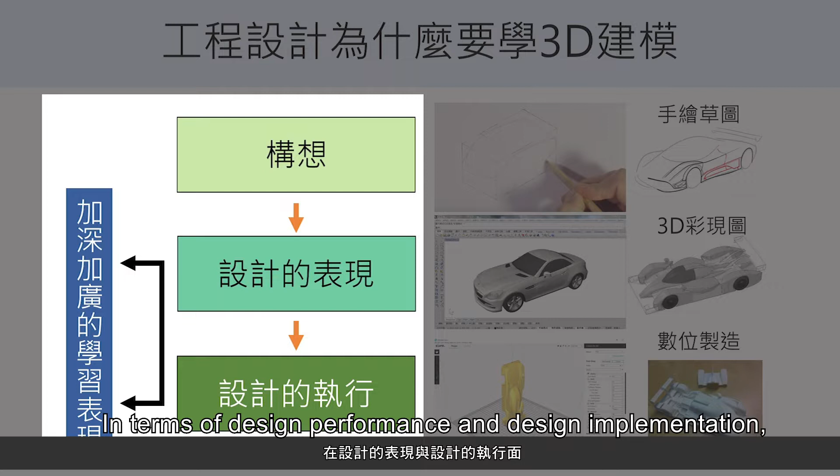In terms of design performance and design implementation, we hope students can make good use of digital design tools to deepen and broaden their extended studies, such as the design sketch completed by students regarding its design modification, detailed structures, spatial organization. If digital tools can be used, whether for photorealistic rendering of 3D models or modification of structural details, it will be more convenient than hand-drawn sketching.

At the same time, if 3D drawing tools are used for design modeling, it can also serve as objective data analysis for engineering design. Predictive analysis is an important learning ability in our in-depth learning, which will further serve as a problem-solving and design thinking method.

Also, for design implementation, especially regarding prototype manufacturing, modern 3D tools combined with digital output equipment such as laser cutting machines, 3D printers, and CNC engraving machines can make students' ideas come true more quickly, while also improving the quality of design and manufacturing.

Therefore, for the design implementation part in the in-depth learning course, students should use digital output equipment as much as possible so that through the process of concept development, 3D modeling, and predictive analysis, the model can be further outputted and go into testing assessment after engineering design prototype manufacturing, so as to make the test and evaluation more objectively accurate. This is also an important reason for learning how to make good use of digital tools and output equipment.

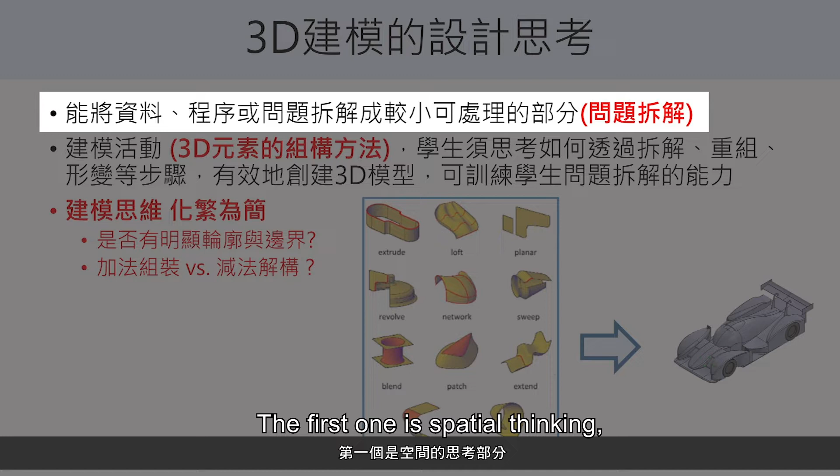The first one is spatial thinking. You need to learn to dissect the problem and disassemble the overall shape or structure into smaller parts that can be handled. For example, this Le Mans racing car at the lower right corner, we can disassemble its tires, wheel hubs, cockpit, rear wheel arch, spoiler, and chassis part by part, and then combine them together to complete this Le Mans racing car.

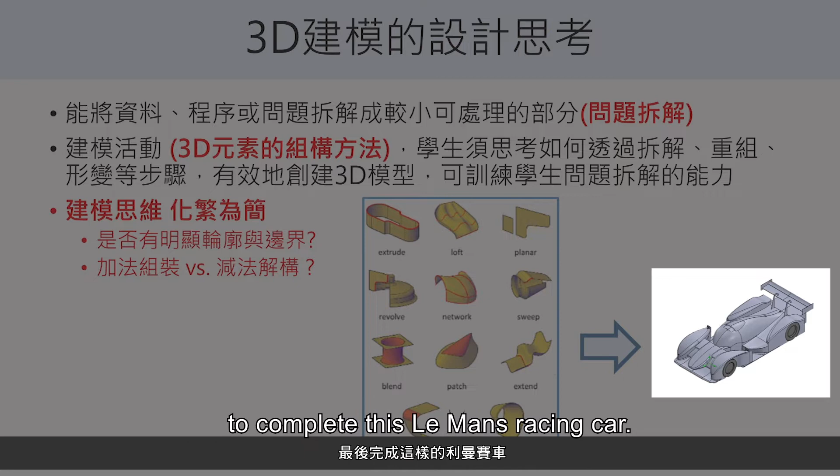The second tip for learning 3D modeling is to familiarize yourself with the commands through modeling exercises. These commands are all assembling methods for 3D elements. Through this practice of disassembling, assembling, and shaping, students can effectively create the 3D models needed. Therefore, familiarizing with the commands is also an important learning process for learning 3D modeling.

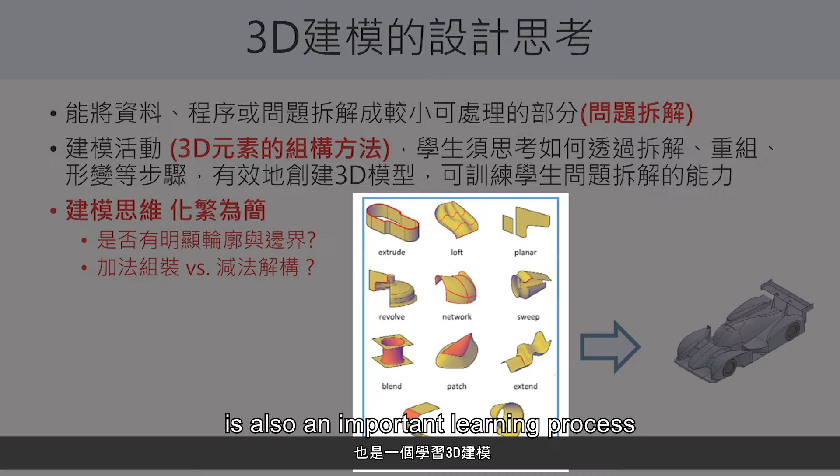The next step is comprehensive modeling thinking, which is mainly to simplify what is complex. You can first observe whether there is a clear contour or boundary in your design model.

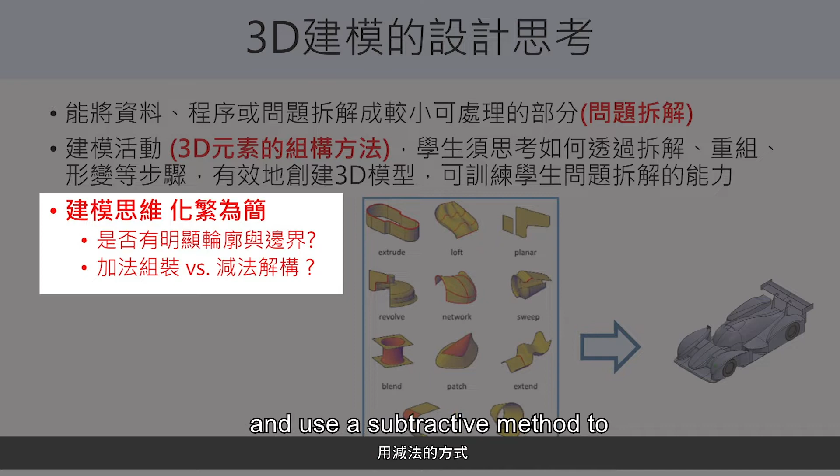For certain modeling, we use additive construction. For some others, we do the opposite and use a subtractive method to complete the final shape we want. These are modeling design thinking, flexibly applied onto 3D modeling tips.

Therefore, mastering the modeling rules is helpful for learning 3D modeling, especially for later on when students want to create their own 3D models. Mastering these rules is very important for future design modeling.

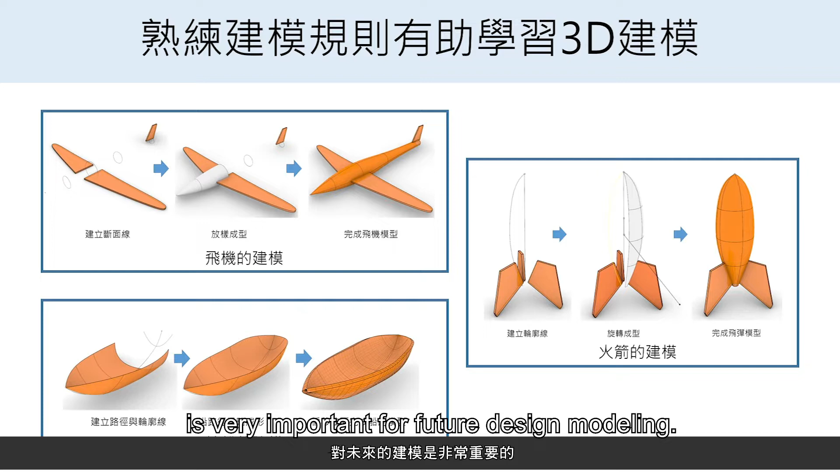Here we will briefly introduce some commonly used 3D modeling commands. The first command introduced is extrude. For extrude, we create a contour line, such as a square, and we turn it 3-dimensional. This 3-dimensional process of extruding the square into a cube is called extrusion molding.

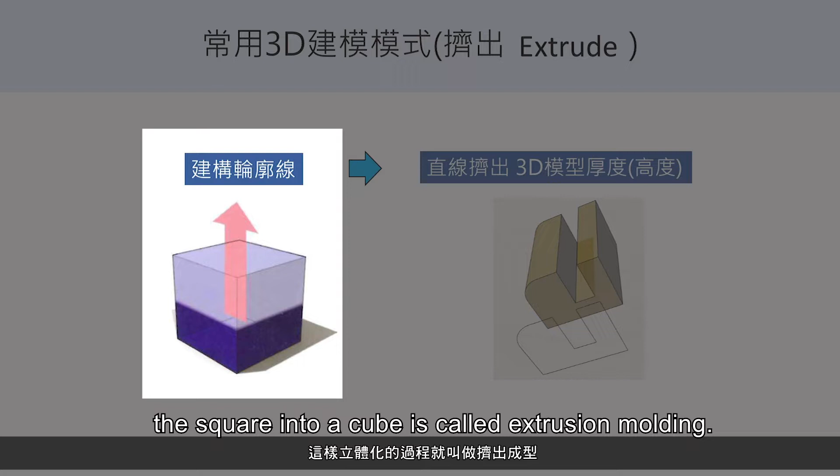As seen at the right, there is a concave-shaped contour. We extrude it to make a 3-dimensional concave-shaped square, which is also a modeling concept for extrusion molding.

The second commonly used 3D modeling command introduced is revolve. For revolve, we create a contour line from its side, such as an arc with a waistline, and after rotating it around the central axis, it will become like a vase with a waistline. This concept is called rotation molding.

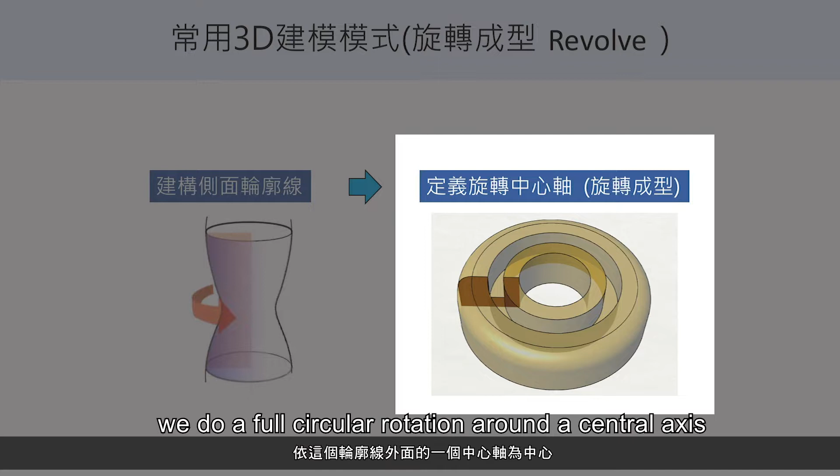On the right, we also use a concave contour line. We do a full circular rotation around the central axis outside this contour line, and we get a hollow 3-dimensional shape similar to a tire structure, which is also an application for rotation molding.

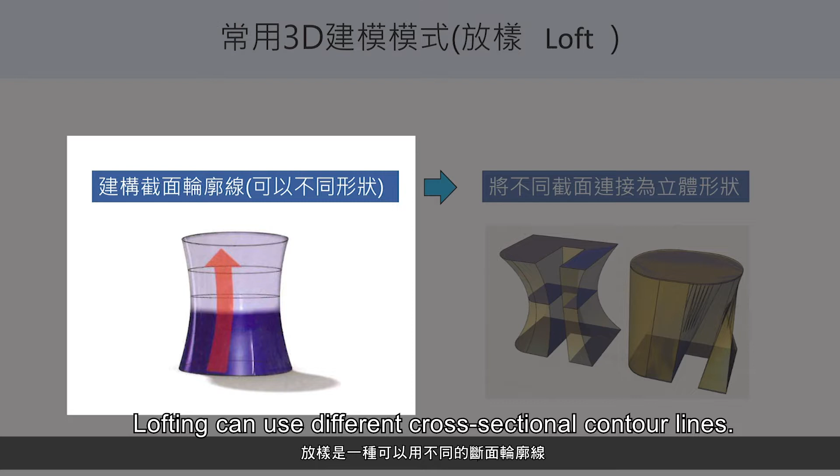The third commonly used 3D modeling command introduced is loft. Lofting can use different cross-sectional contour lines. For example, we use a large-sized ring and a medium-sized ring followed by another large-sized ring. Each ring is a bit like the concept of making a lantern. We use cloth to stretch it up and wrap it around 3 or 4 different rings. The shape formed in this way is called lofting.

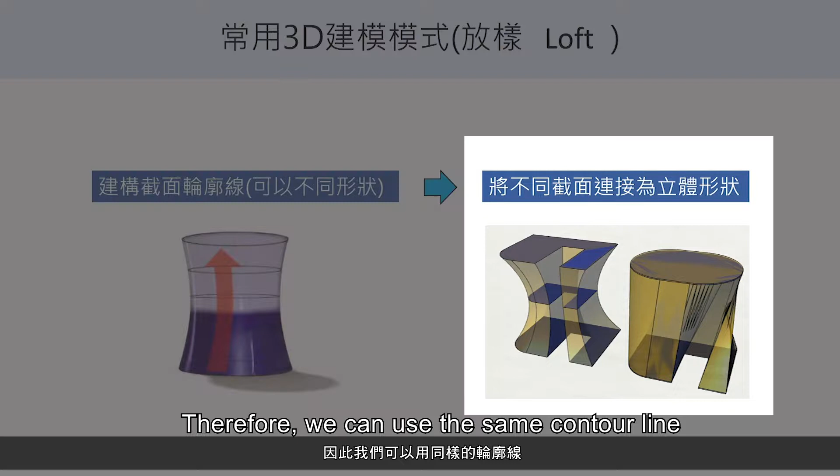We can use the same contour line or completely different contour lines, as long as it is either a closed loop contour line matching another closed loop contour line, or an open loop contour line matching another open loop contour line, to be used in the loft command for shape forming.

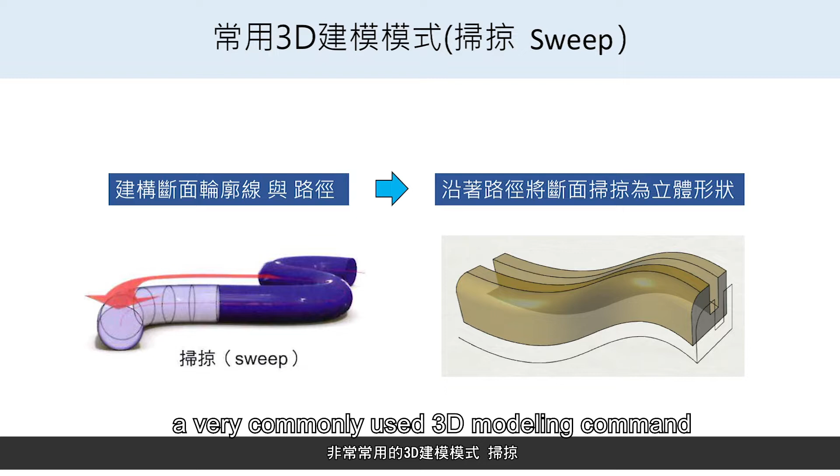Finally, we will introduce a very commonly used 3D modeling command: sweep. For sweep, after a contour line is created, we set out a path. On screen, we use a circular cross-section as the contour line and an S-shaped wavy line as the path. After sweeping, it becomes a curved shape, similar to a water pipe.

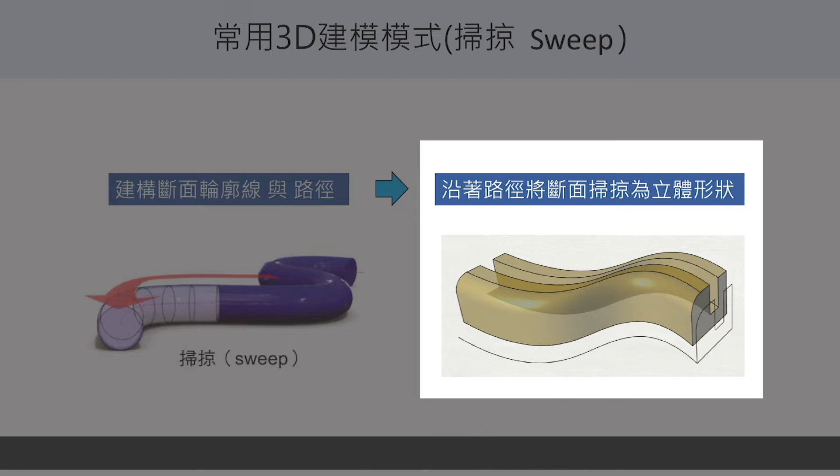On the right, a concave outline is also used, with a wavy path. With this cross-sectional outline following the path, the shape we get is a curved 3-dimensional shape, as you can see here.

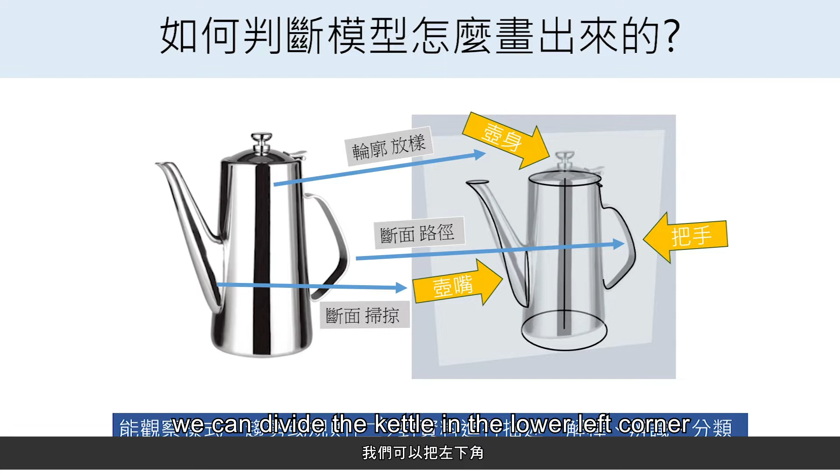From the 3D modeling commands introduced earlier, let's think about how this water canteen is drawn. From the disassembly of the space problem, we can divide the kettle in the lower left corner into 3 parts: the spout, the body, and the handle. On the right is a breakdown explanation of these 3 parts.

For the canteen's spout, we completed a small oval cross-section and a large oval cross-section, swept along this path to make the shape of the spout.

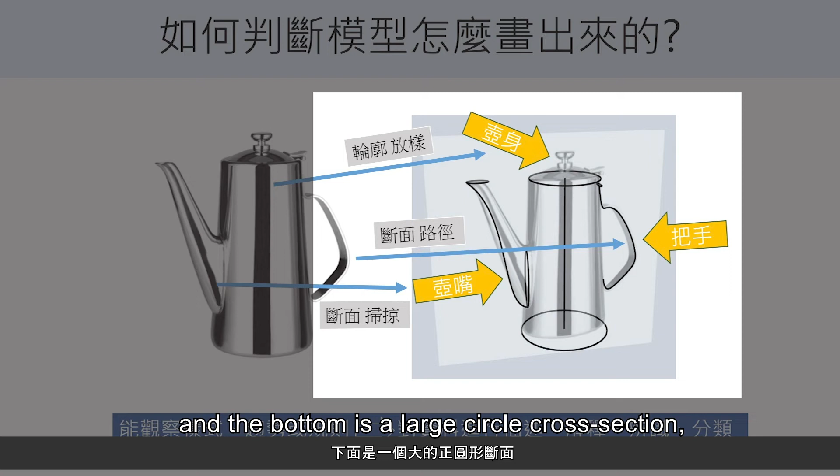For the canteen's body, the top is a small circle and the bottom is a large circle cross-section. We make the shape of the body through lofting.

For the canteen's handle, we draw an oblate circle, swept along the hook-shaped contour line to complete the handle. Therefore, this canteen can be completed using these 3 3D modeling commands.

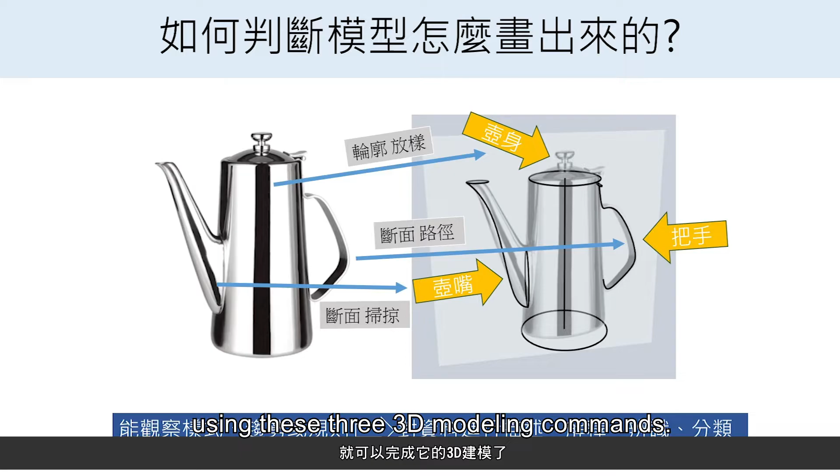We have introduced some basic concepts of 3D modeling and some tips for modeling. Next, we will go through actual operation of 3D modeling.

The software used for demonstration is Rhino, which means rhinoceros in Chinese. This 3D modeling software is used in engineering and is generally used in industrial product design. Generally speaking, it has the following 5 main features, which is why we choose to use it.

First, it can create a variety of 3D shapes free of any constraints. Second, it is a software that is easy to learn, and users can concentrate on the design of the concept idea without spending too much time learning the commands and parameter settings.

Third, its precision. It is accurate enough to meet the needs of the various stages of design, digital manufacturing, and engineering analysis. Fourth, its software compatibility is very good. It can combine with other design, drawing, digital manufacturing, and engineering analysis software, which can all be used together.

Fifth, its hardware requirements are very low. It can perform very well on ordinary laptops.

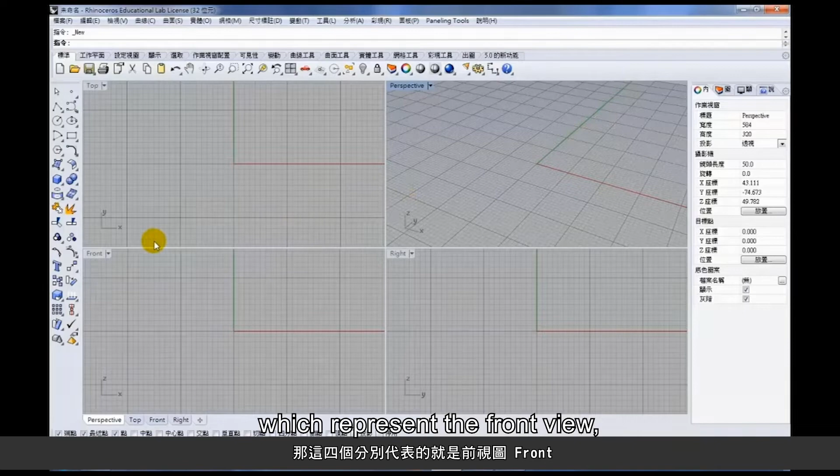After opening the Rhino template, we will see that there are 4 panels on the screen, which represent the front view, top view, right view, and perspective view.

I will draw a cube to explain what each of these views represent. There is a cube command here in Rhino. You can left-click your mouse to select this command. I will draw a long rectangle at the top view, while at the front view, I will drag it to a certain height. And you can see this model in the perspective view.

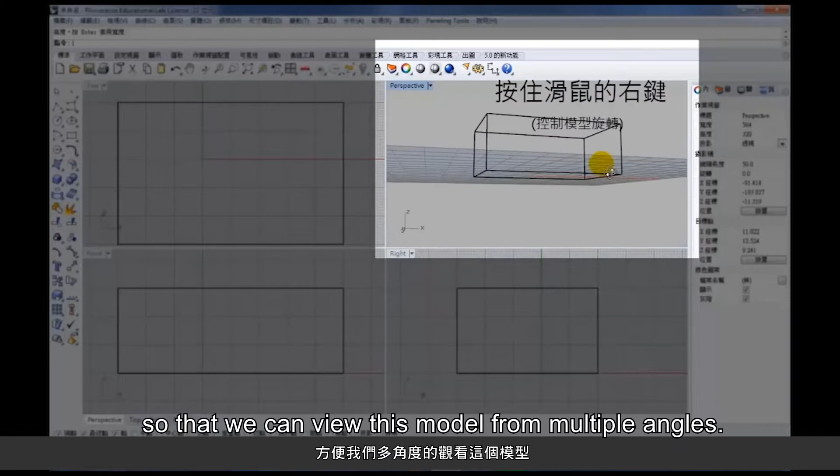Here I right-click and hold the mouse to rotate the model so that we can view this model from multiple angles. The current model only shows the frame lines, so this is called the wireframe display.

If you want to see more clearly, you can right-click your mouse in the perspective view and select the shaded display. Likewise, in the front view, we can also right-click to change to shaded display. The top view can also be changed to shaded display, and the right view can also be changed to shaded display.

Here I will explain the angles of the front view, the top view, and the right view and their relationship. In terms of this 3-dimensional square, if we turn in this direction, it represents the shape of the front view. So you can see these 2 shapes are the same.

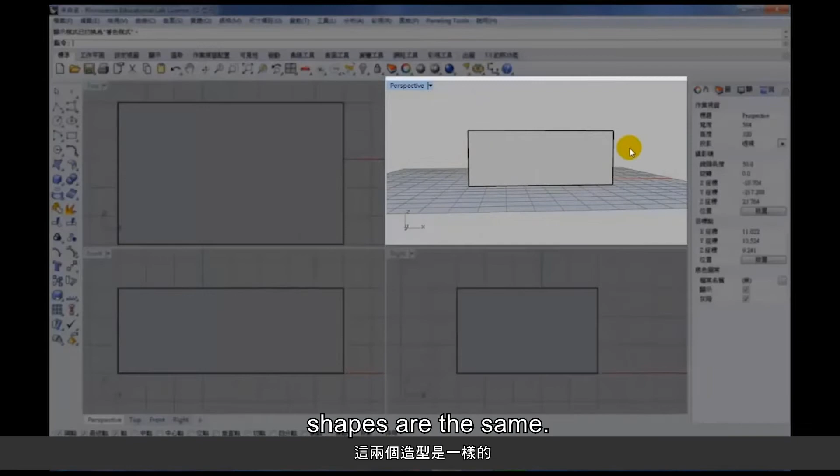The top view is to look at this model from above. I will rotate to an angle from top to bottom. And you can see that this shape is the same as the top view.

So in the same way, let me go back to the front. When we see this model from the right side, it represents the right view. So this is consistent with the concept learned in graphics.

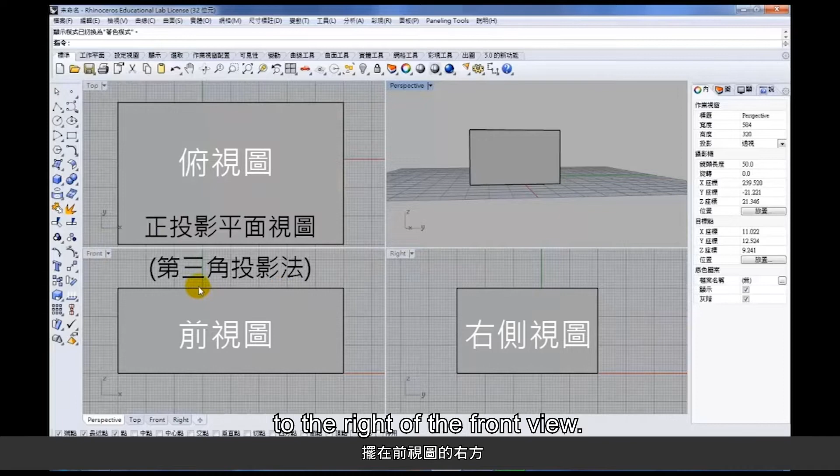Front view, top view, right view. This is the 3rd angle projection method, which is what we call the orthographic projection planar drawing method. Its relative position is that the top view must be above the front view, and the right view has to be placed to the right of the front view. So this is the basic concept of graphics. The upper right corner shows the 3-dimensional shape, which helps users view its 3-dimensional relationship at all times.

Next, we will demonstrate how to switch between panels in Rhino and control the model. In the Rhino environment, we click on each panel, and it will automatically switch to the operation of that panel. For example, I click on the front view panel, it will switch to the operation of the front view. I go back to the right view and click it, and it will automatically switch back to the right view.

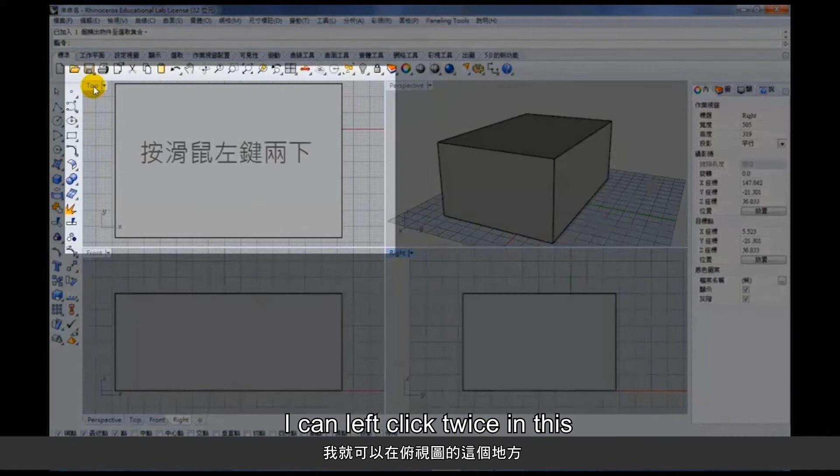In the top view, let's say I feel like I need to enlarge it to work on it. I can left-click twice in this place on the top view and enlarge it to a full screen size so as to facilitate my drawing. In the same case, I left-click twice here on the top view and it will switch back to the original 4 panels. This is the way of switching panels in Rhino.

I will repeat it again. For example, if you click twice on the front view, it will be maximized. Click twice again, and it will switch back. Left-click twice on the right view, and it will be maximized. And left-click twice again to switch back.

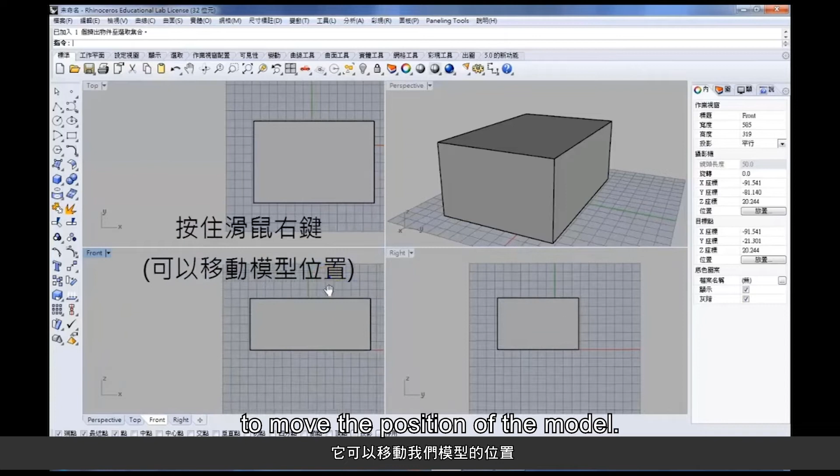This is for switching between panels. Regarding the control of the model, we can change the size of the model by turning the wheel in the planar view. Right-click and hold to move the position of the model. This is the way to control the model in Rhino.

For example, I click twice on the top view to maximize it, and if I want to enlarge the size even more, I turn the wheel to zoom in to do the control needed for our drawing. This is the way of adjusting the model that we often use in Rhino.

Right-click and hold in the perspective view to rotate the model. Since it is not possible to rotate the viewing angle in any planar view, right-clicking is defined to move the model instead.

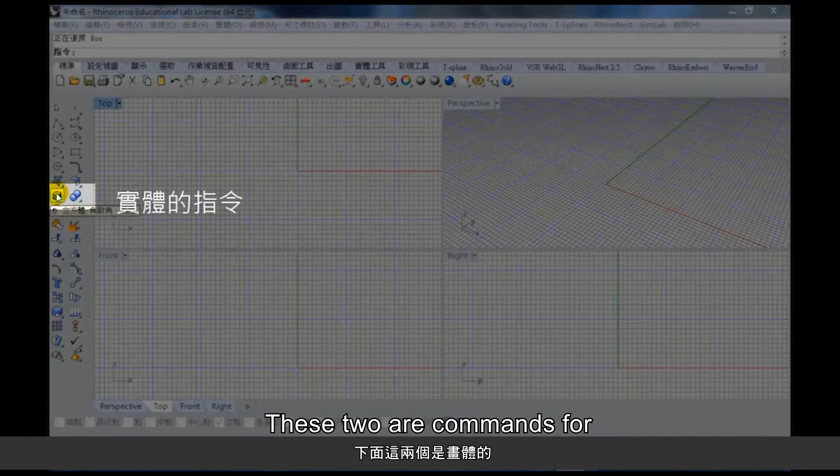Rhino's command interface can be divided into graphic type commands on the left side. At the top of the graphics commands, here is the selection tool and the point tool. These 8 icons are all styling commands for drawing lines. These 2 are commands for drawing or editing of surfaces. These 2 are commands for drawing and editing of solids.

These last few ones, some of them are for grouping, exploding, copying, and trimming, and these are other application commands related to the operation of 3D models.

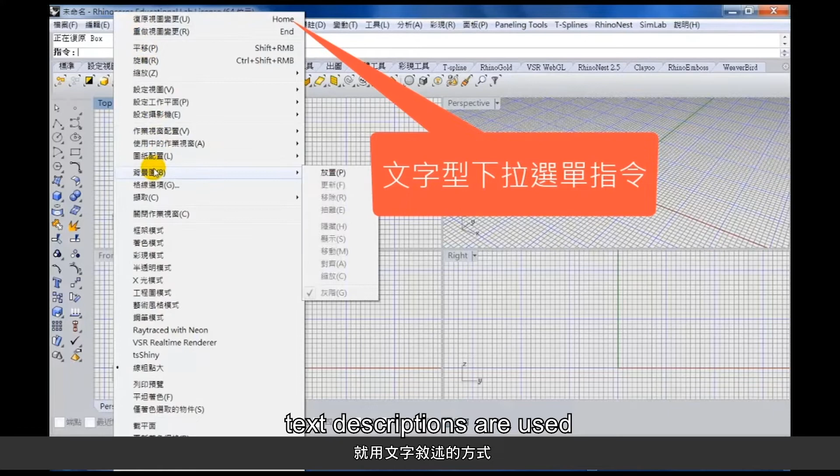The upper part can be divided into 2 parts. This part is a menu type command. When you select the menu, the relevant commands will be listed for you to use. The same goes for the display and select menus. These at the top are text type drop-down menus. In our menus, text descriptions are used to explain the operation commands. This is the way commands are arranged in Rhino.

Here, we will use a solid command to explain model control in Rhino. If we click our solid tools icon for a bit longer, we can change the shape command. There is cube, sphere, ovoid, parabola, cone, truncated cone, and pyramid.

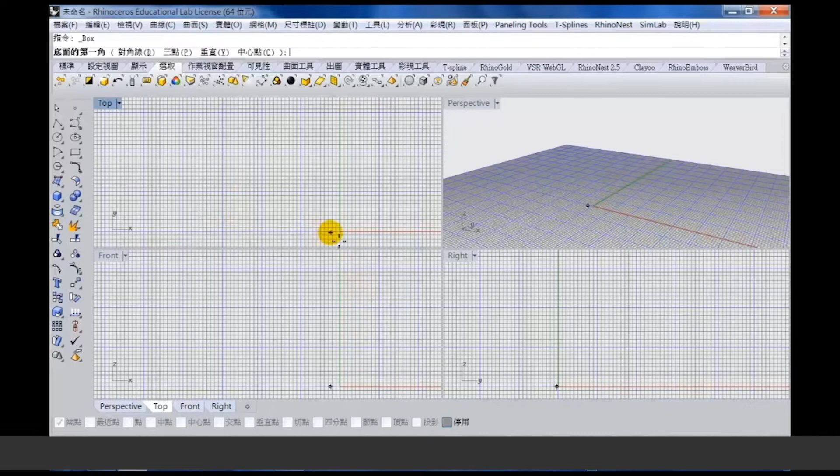These shapes can be directly drawn as a 3-dimensional shape. For example, I draw a square on the top view panel from the coordinates origin to a distance diagonally of 3 times 3 large grid segments, and then a height of also 3 segments.

This kind of drawing, we may think that the size is 3 times 3 times 3, but when we enlarge the model to a certain extent, we realize that we did not actually align it to the position that we wanted. So it's not very accurate for us to draw a model by visual observation.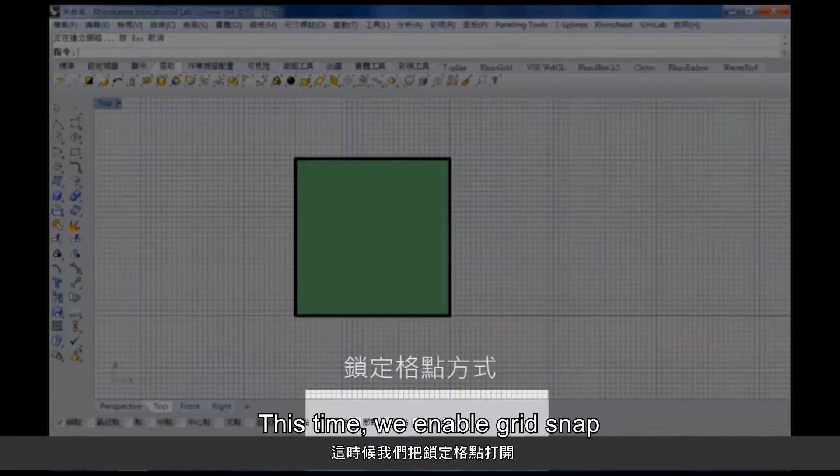Here I draw another 3 times 3 centimeter square through object snapping for you to see. This time, we enable grid snap and object snap. We again use the cube command. You can see that now the cursor is like a magnet and will attach to these points.

Again, I will draw up to 3 grid segments diagonally, and then in the front view, I will drag its height up to 3 segments. At first glance, the 2 models look the same size, but we have just proved that at this point, it is not precisely at 3 centimeters.

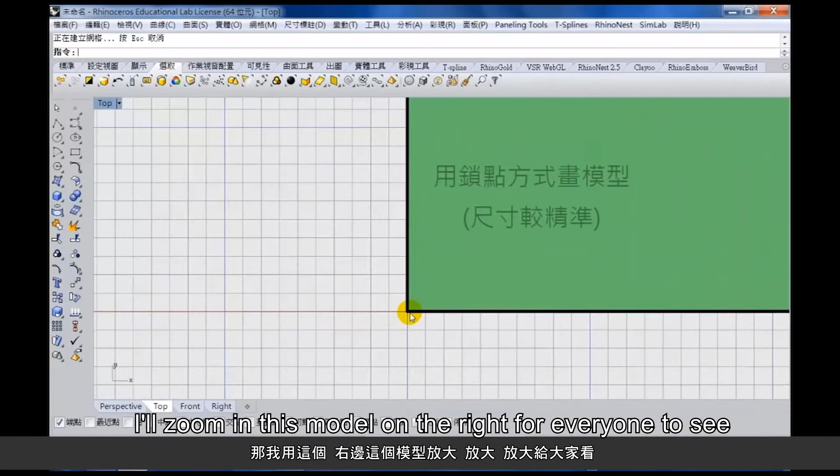I'll zoom in this model on the right for everyone to see. It is, in fact, precisely locked into the position we want. It is so for its left side and also for its right side.

Therefore, when modeling in Rhino, we often need to enable the grid snap and the object snap modes in order to draw our models more accurately. For the following procedures, I will demonstrate using similar methods.

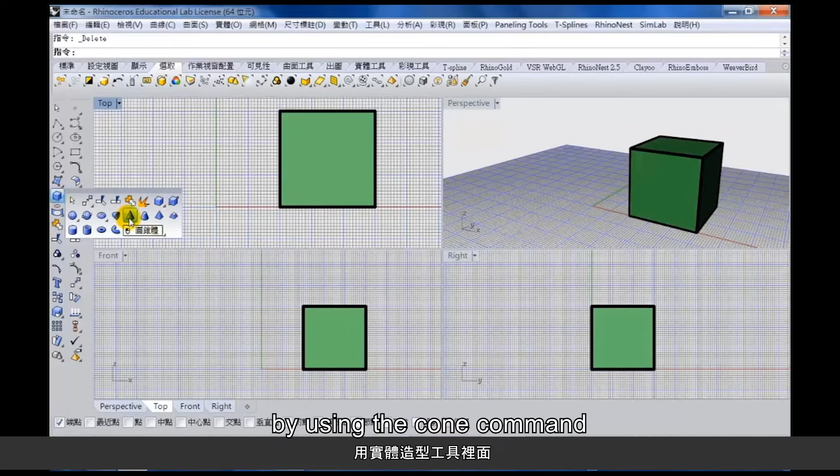We don't want this model on the left anymore. Next, I'm going to draw a cone next to the cube in the same way, using the cone command inside the solids tool. For this cone, I would like its base area to be 4 centimeters diameter, so I'll look for 2 large segments. Then it can be pointed upwards or downwards. You can also draw up to 3 centimeters in the front view panel. This is the cone that I drew.

Next, I will draw a sphere. This sphere command is also found inside the Solids tools. In the same way, I will draw a sphere with a 4 centimeter diameter.

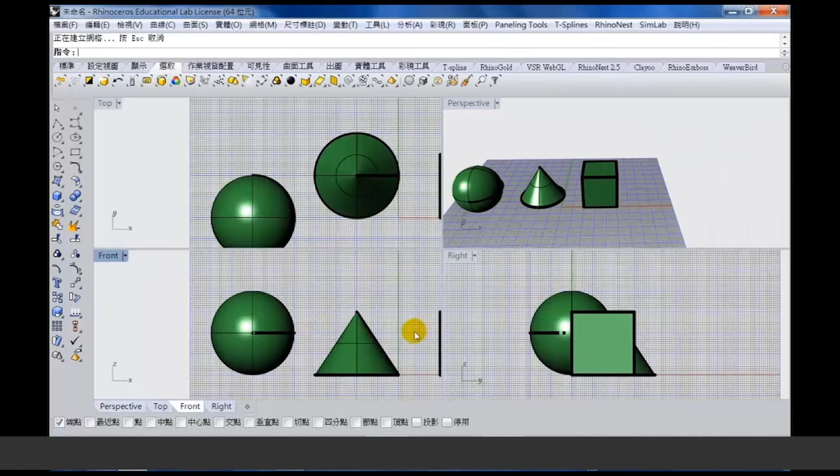Next, I will do some moving, copying, and transformation operations for you all to see. There are many ways to do this part. There is a great tool in Rhino 5.0, called Gumball. For Gumball, we select an object.

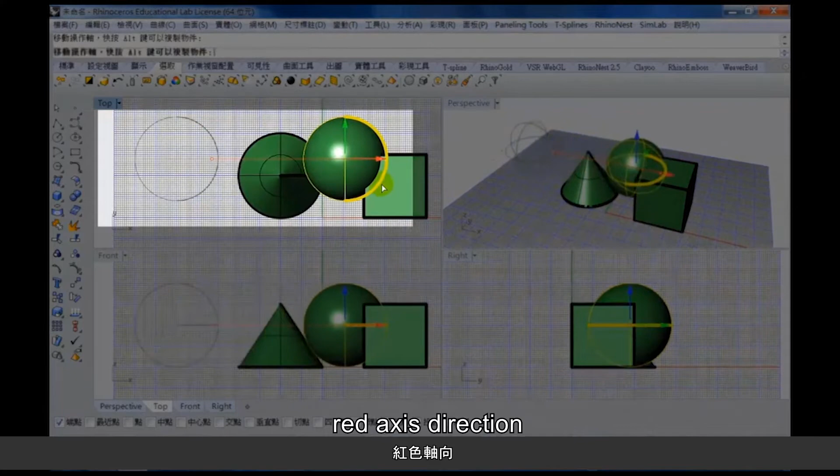A point is defined at its center, and there will be some cursors. We click on the cursors, and in the green axis direction, red axis direction, or blue axis direction for height, we can control it with precision.

This way, we can move the object to the position we want. For example, if I want to make an effect similar to the stacking of building blocks, I will move the sphere on top of the cube. I will align it right in the top view panel, and then in the right view panel, I will adjust the height to the position I want.

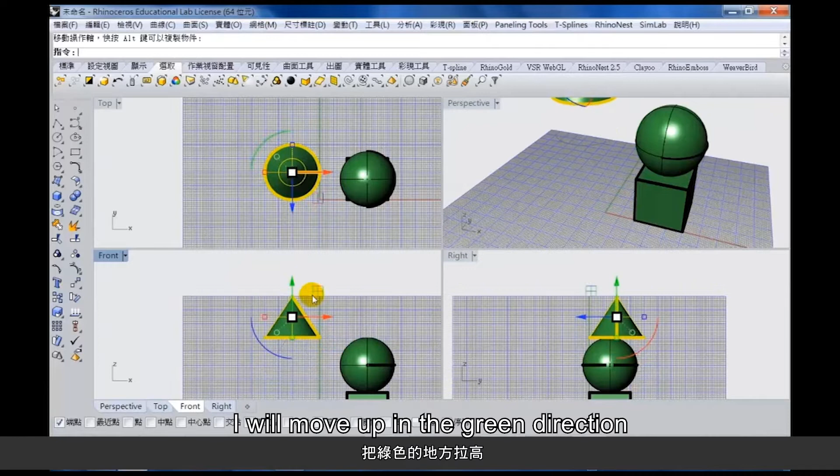Then, I will put the cone on top of the sphere. In the same manner, by controlling the gumball, I will move up in the green direction and adjust accordingly in the red direction. Then in the top view panel, for the front and back depth position, put it in the same position as the sphere.

Then open the perspective view panel, so through the movement of the gumball, we can accurately place each 3D model in the position we want. This is the operation method of the gumball.

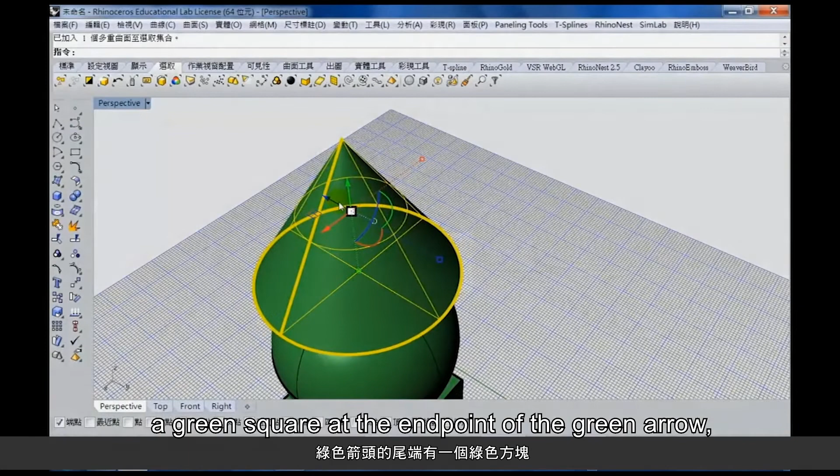You can carefully see that there is a square at the endpoints of each arrow of the gumball. For example, there is a red square at the endpoint of the red arrow, a green square at the endpoint of the green arrow, and a blue square at the endpoint of the blue arrow. This square is for the scaling of the axis. For example, now I'll click on the blue axis square.

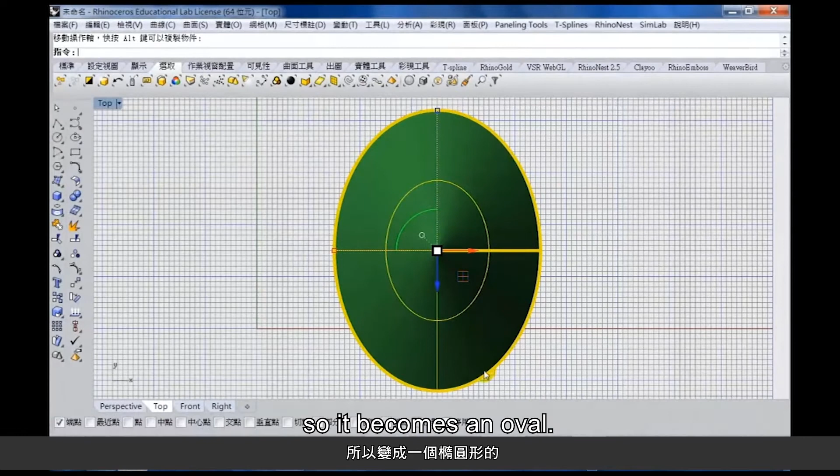Then I can go inwards to turn it into a flattened cone, or go outwards to turn it into a fat cone. The scaling only works in that axis direction—it will only scale in the blue axis direction. The red axis direction will remain 4 centimeters. As you can see from the top view, the red axis is still 4 segments, but the blue axis has been elongated to more than 5 segments, so it becomes an oval. This is Rhino's gumball being able to scale in a single axis.

In the same way, for example, I want this cube to be fatter in the green direction. I will pull the green square and it can elongate. For the sphere, I also want it to be fatter in the red direction, so I click and hold the red square and it gets fatter. So our model turned into this, with its scaling in a single axis.

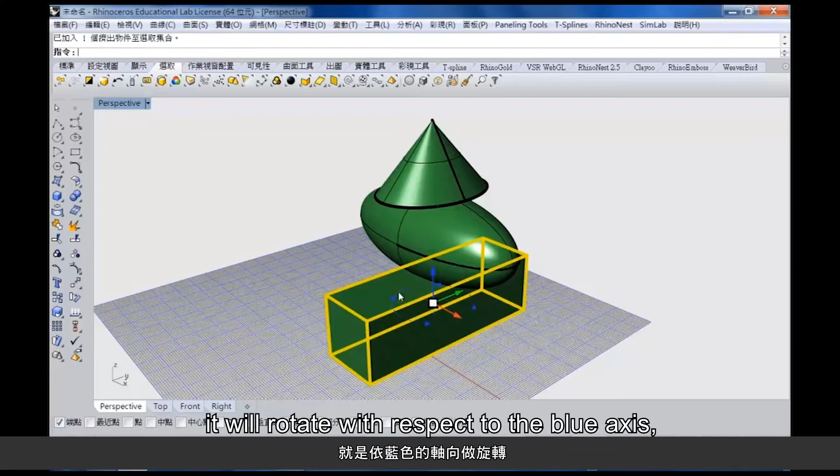In addition to scaling, using the gumball tool, we can also use angular rotation controls. For example, the blue arc, the red arc, the green arc—it will rotate with respect to the blue axis, rotate with respect to the red axis, and rotate with respect to the green axis. For such operation in this 3-dimensional environment, it may be difficult for us to control the rotation according to a specific angle. This situation makes it difficult to control the rotation angle between the models.

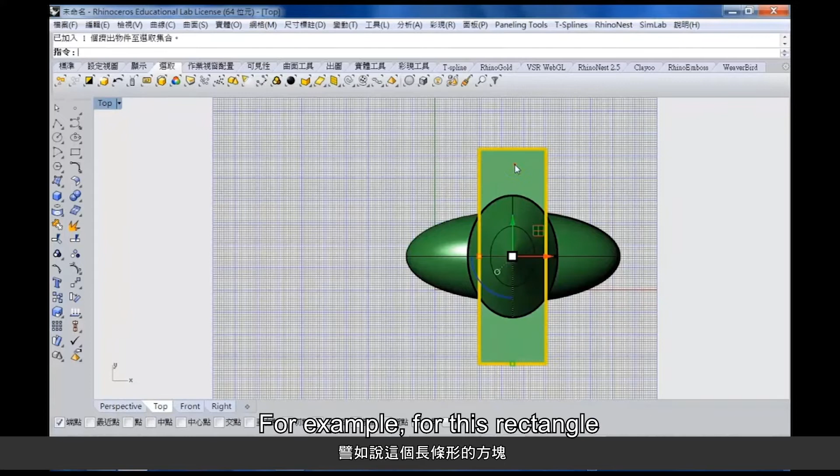Therefore, for the rotation of the gumball, it is generally recommended to operate in a planar view. I will use Ctrl-Z on the keyboard to restore the model to its original angle, and perform the operation in the top view panel. For example, for this rectangle, I will rotate 45 degrees with respect to the blue axis. I click on the blue axis arc and directly input 45 degrees, and then it will rotate 45 degrees. This kind of control is more accurate than dragging.

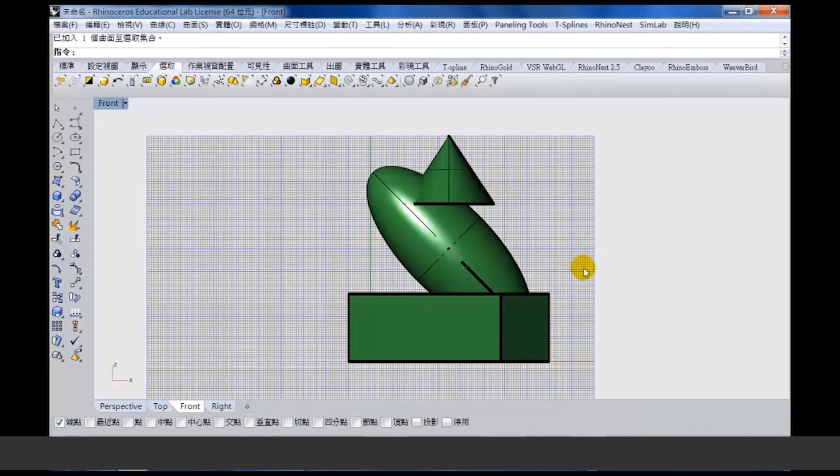This is the use of the gumball. I will repeat the operation again. For example, I select the oval sphere in the front view. I want it to rotate 45 degrees with respect to the green axis. The same way, I input 45 and press enter, and it rotates to that angle. The angle you see with the cursor here is 45 degrees. This is the use of the gumball, which can be controlled through input.

So, I'll demonstrate again. In this right view panel, with respect to the red axis, I input for it to rotate 45 degrees, and it will rotate 45 degrees. The final angle of this model will be like this.

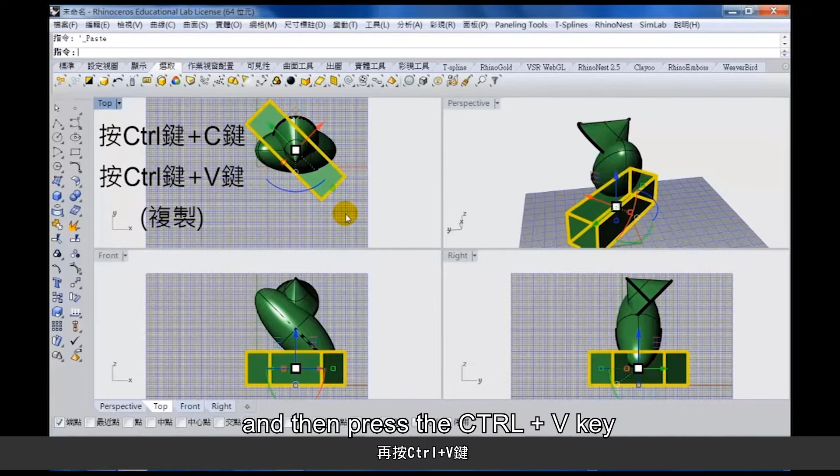We can also use the gumball to perform a copying action. For example, I select this cube. After I select it, I press Ctrl+C and then Ctrl+V to copy an identical model. Then I use the rotation function of the gumball to adjust it to a 90 degree rotation. Now there are two shapes forming a cross.

In the same way, I do the same with the oval sphere. After I select it, I press Ctrl+C, then Ctrl+V, and then with respect to the green axis, I also rotate it 90 degrees. In the same way, it will show a cross with these oval spheres.

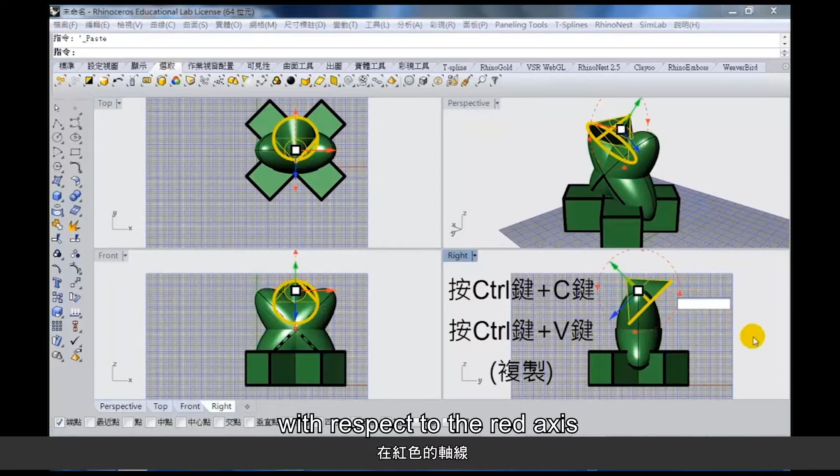Finally, here, after I select it, I press Ctrl+C, then Ctrl+V. With respect to the red axis, I rotate it 90 degrees. This way, we will produce pairs of shapes crossing each other.

So far is the demonstration of how to use the gumball in Rhino 5.0 to control these models, adjust their angles, and copy them. This part's demonstration is now over.

We have learned about the basic operations of the user interface in Rhino. Our next topic will be using commands to perform the first stage of modeling for our compressed air racing car. Here we open the right view panel. Click to enlarge. We will first draw in this panel the tires needed for our compressed air racing car.

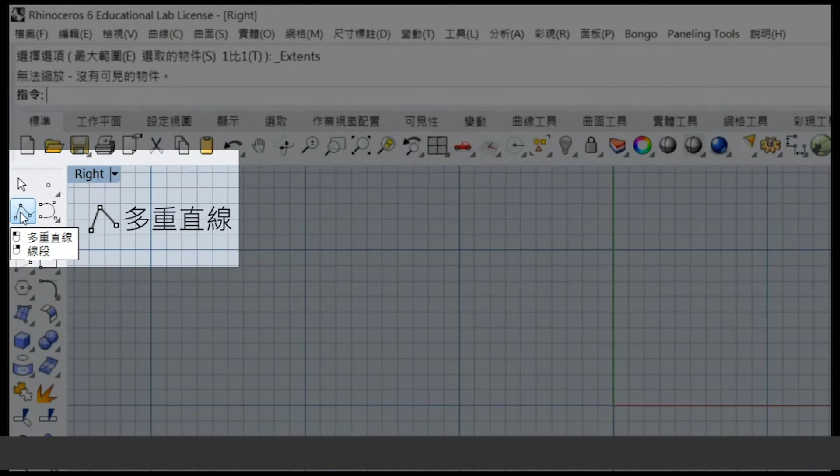First, we select the polyline command. When operating in Rhino, we use the left button of the mouse to select commands, to find the relevant coordinates, or select the relevant objects. This point of origin on the screen is the origin of the global coordinates. At the intersection of the red and green lines, we draw upwards 5 millimeters, then a depth of 1 centimeter, then upwards 1 centimeter, with a total height of 1.5 centimeters. Then go inwards back to our green axis, go up 3 squares, and keep a distance of 3 squares from the lines before it.

Here we have completed the first contour lines that we need. You can see that these are line segments drawn one by one from this polyline. Because we have both grid snapping and object snapping enabled, our position is accurately aligned with the grid points, so what we drew will be of whole number values.

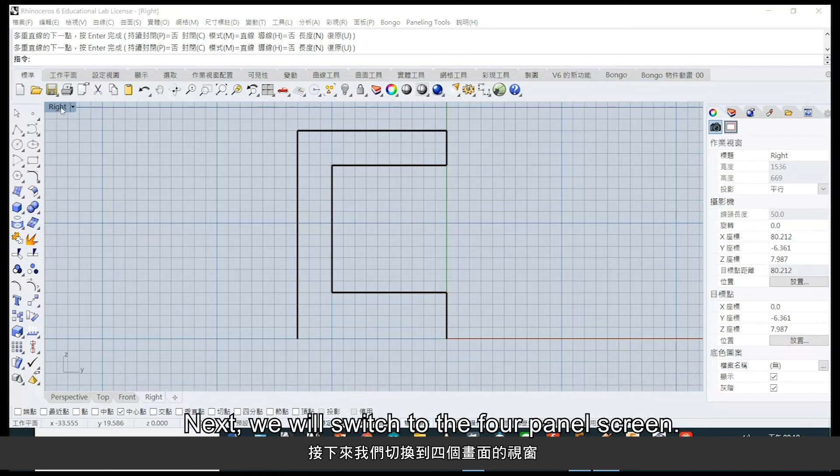Next, we will switch to the 4-panel screen. In the perspective view, we can see that what we just drew was a planar contour line. Here we will rotate this contour line with respect to the green axis, and it will become a 3-dimensional solid model, which is the tire shape we want to get.

Inside the surface modeling tools, with the left button of the mouse, we select the fifth command from the bottom. Select our object. To tell the computer we're done with the selection, we have to press Enter. In here, the right mouse button has the same meaning as the Enter key on the keyboard.

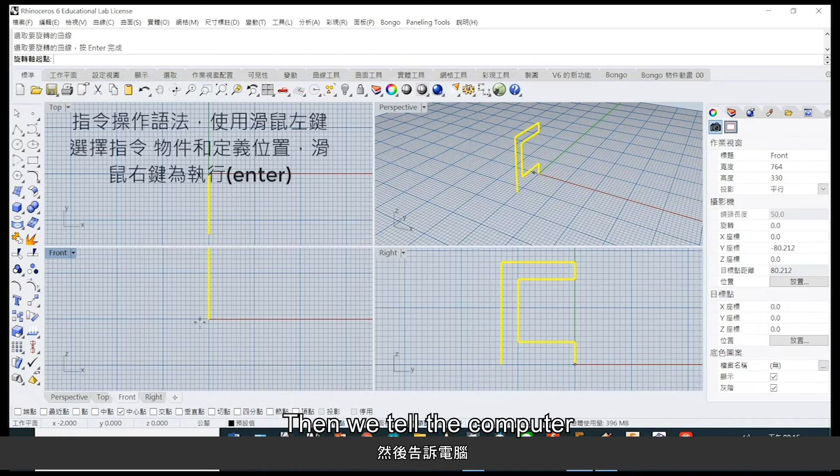So I just press the right mouse button. Then we tell the computer where we define the location point, which is the front view where the cursor is right now. So we find this point at the origin of the coordinates and tell the computer that we are finished defining the point. We press Enter again, or also clicking the right mouse button.

Here, we will see a 360-degree circle and an axis. This is for us to input 360 degrees directly, or, as seen on the screen, we can define the tire to rotate to 270 degrees, which is the meaning of rotational molding. However, our tire basically needs to rotate 360 degrees completely for it to be a complete 3D model.

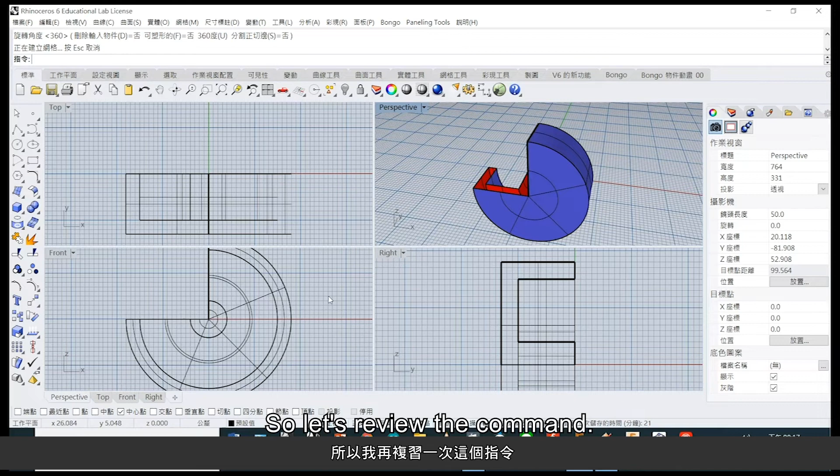So let's review the command. Inside the Surface Modeling Tools, select the Revolve command, fifth from the bottom. Select our object by clicking with the left mouse button. Once selected, we click the right mouse button.

Next, we define the center of rotation, which is the origin of the coordinates, and then press Enter again to tell the computer that we've selected the origin. Then select directly 360 degrees on the command bar, and it will directly complete a 360-degree revolved model.

We can open the perspective view and see that this model is the tire that we want for our compressed air racing car. After these two operations, you will realize that for the commands in Rhino, we use the left mouse button to select the commands or select the defined position. To tell the computer we're done, the step is to press the right mouse button.

Again, let's do another demonstration. We need fillets for this solid, that is, the edges of the tire need a rounded shape. Here we will use the body editing tool. Next to the cube, there is an icon of two spheres stuck together. Press and hold to pop out the window and choose the fillet command.

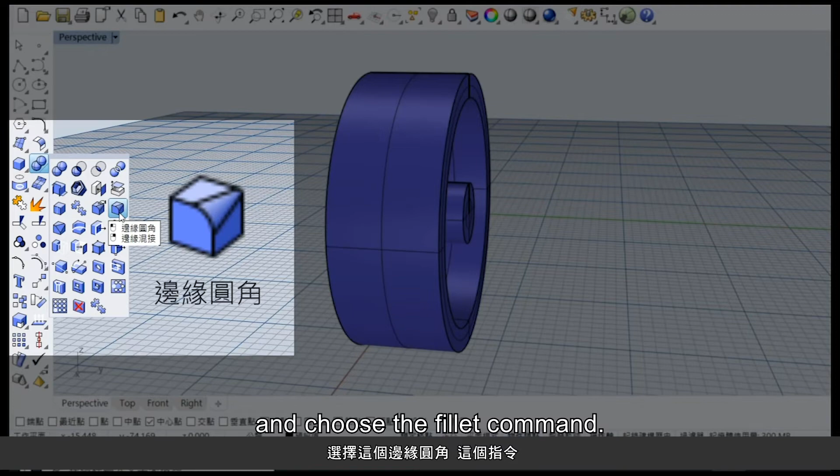After selecting the command, we tell the computer the places processed are these two edges of the tire. Here is to input the fillet radius. Our current default value is 1. Let's see how it looks with value 1. We press Enter directly and see that we turned the originally sharp edges of the tire into an arc shape.

Next, at the corner of the inner side of the tire, we want it to have a larger fillet, to prevent our 3D printed tire from having stress concentration issues at these places where strength is needed, which can cause damage to the tire.

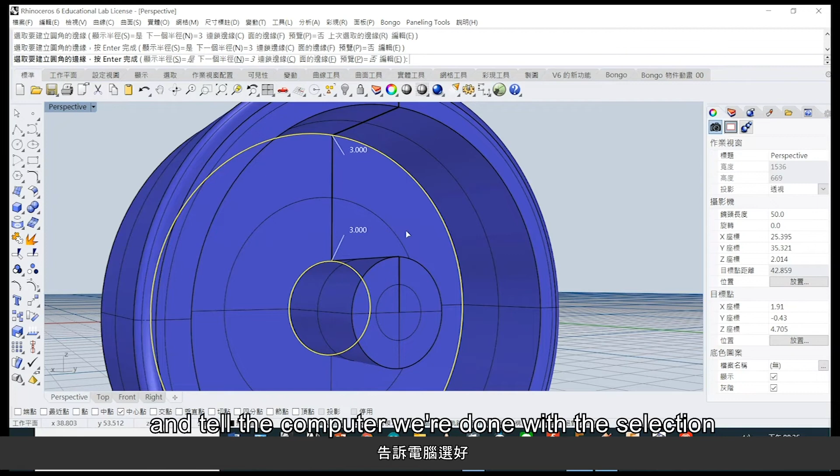So in the same way, we also use the fillet command inside the solid editing tool. Select next radius and input the value 3 so that the fillet can be larger than the previous one. Then select our edges, select these two places, and tell the computer we are done with the selection by clicking the right mouse button. This time, we can get a larger fillet at the corners of the tire and the inner face of the tire.

Now, by drilling an axis hole, we can finish the tire's basic structure. Here, we can directly use the solid modeling tool to create a circular rod by using the cylinder command. In the front view panel, select this point at the origin. We enter a diameter value of 3.5 millimeters, and in the top view panel, we drag a cylinder that is longer than our tire.

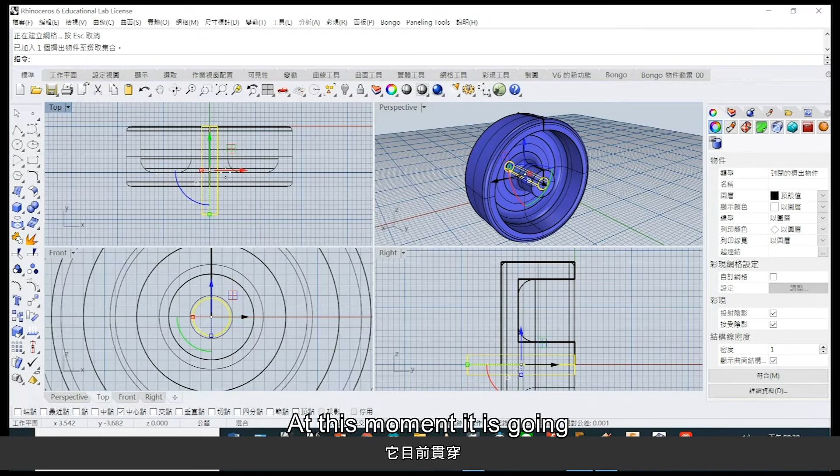I'll select it for you to see. At this moment, it is going through the front and back of our tire. Next, we will use this cylinder to drill out an axle hole shape in our tire that can be used as a 3D printed tire.

What we need to do next is the processing of the model, using the boolean operation inside the Solids tool. There are 4 types of boolean operations: one is union, another is difference, so here we should use boolean difference by doing subtraction.

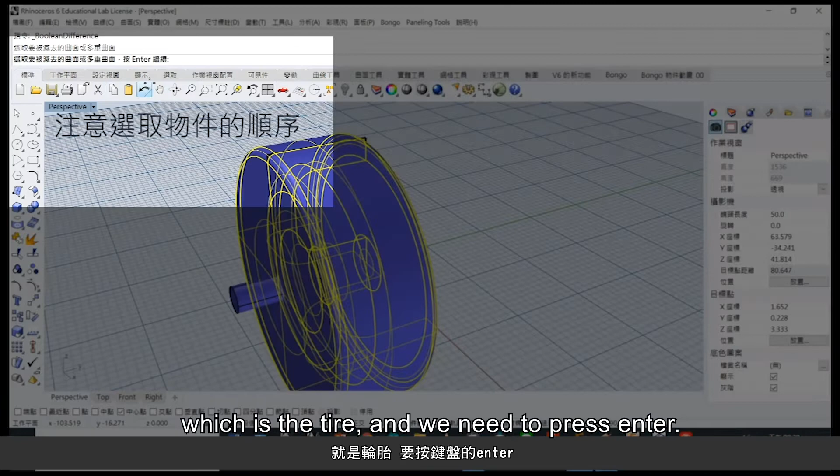The command bar will remind us what to do next. It tells us to select the surface or multiple surfaces to be subtracted, which is the tire, and press enter. Then select the surface used to trim the other object, which is our cylinder. We tell the computer we're done selecting, press enter, and we've completed a tire with an axle hole.

Next, in the front view panel, we use the gumball to copy the tire and move it to the back, and move the original tire forward.

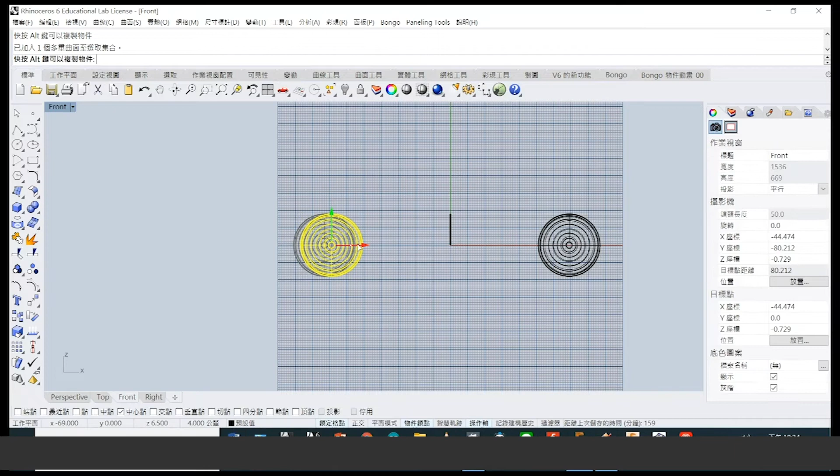Here we need to check our compressed air racing car's side contour line. We make an overall design plan based on the position of the tires. For example, we align the axis of the front wheel to a distance of 3 centimeters from the edge. The rear wheel is also at a distance of 3 centimeters.

Then we draw the side contour of our compressed air racing car. We use the control point curve command to draw the contour line for the side of our compressed air racing car.

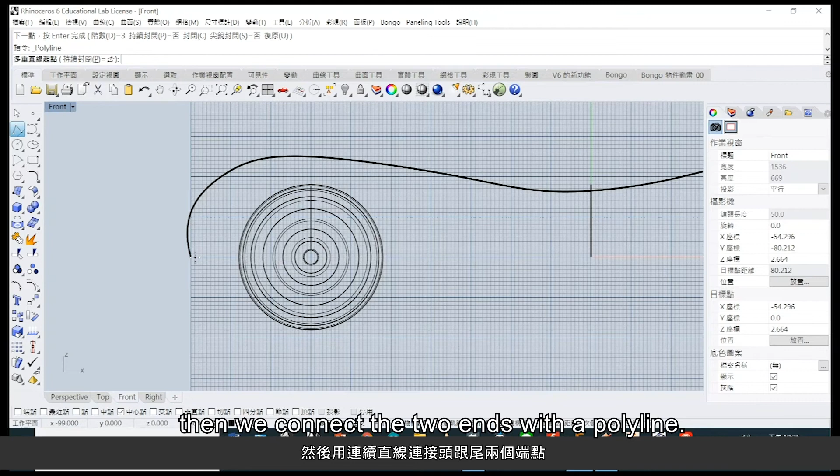And then we connect the two ends with the polyline. This contour line here will be used as the waistline of our car body.

We want the tires to move up a little so it can be hidden under the waistline as the hub of the front wheel. The same goes for the rear wheel, we move it up 5 millimeters, and this will be the hub of the rear wheel.

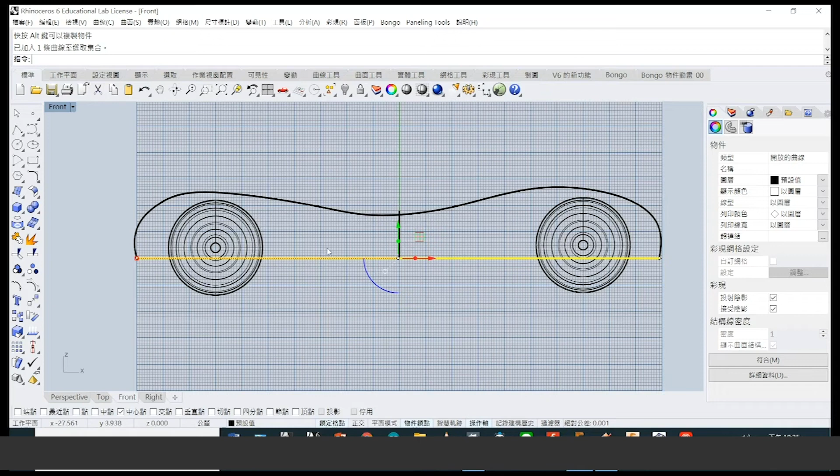Once we've finished the skirt line and the waistline, we combine them together into a closed loop curve. Here, we will do a 3-dimensional extrusion.

The command is inside the Solids tool, the third one from last, Extrude Closed Planar Curve. Select the command, then select the contour line we want to extrude, and press Enter.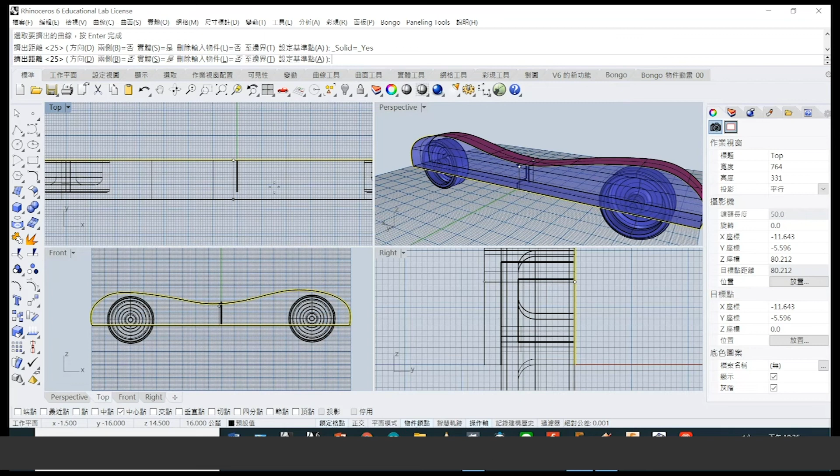Here we can choose both sides or a single side to extrude our contour. We extrude 2 centimeters, then move this extruded solid until it covers the tires.

Next, let's complete the car roof, which is a contour between the shoulder line and the roof. We also use the control point curve command. In the same way, we start from this end point and draw a surface with low inclination as the roof.

We need to go up because the design parameters require 5 centimeters height. From the bottom of the car, we go up 1 centimeter, 2 centimeters, 3 centimeters, 4 centimeters, and 5 centimeters. The car body's highest point should reach up to here.

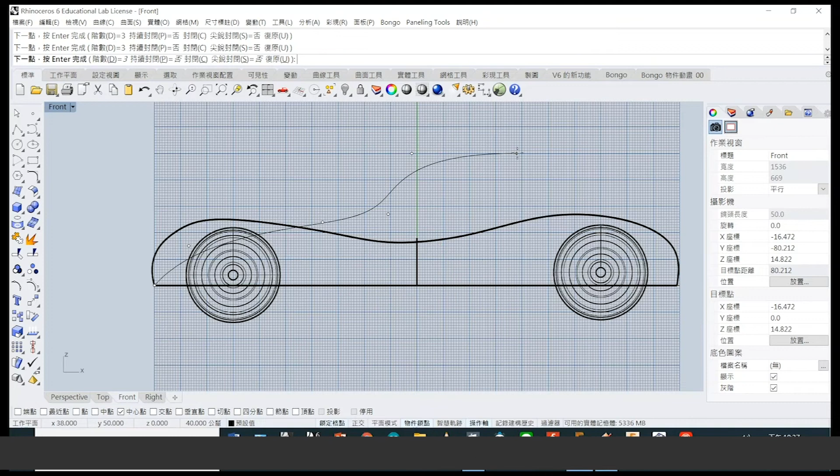We extend backwards. Here we want to mount the steel cylinder 4 centimeters above the skirt line, so here we go up a little bit so our cylinder can be closed at this height.

Here we can reduce some weight, so we surpass our axle to the front of the wheel and make an ending. This is the contour line of the center of our car body.

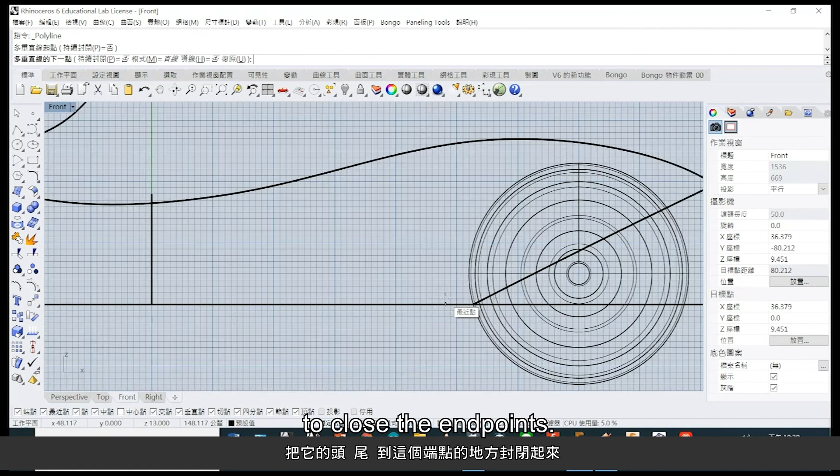In the same way, we draw a straight line to close the endpoints. This contour and the line we just drew at the bottom of the car, we combine them together, and then we switch to the perspective view panel.

Again, let's repeat the extrude command. In the same way, we select the Extrude Closed Planar Curve command inside the Solids tool. We will cancel the options to extrude on both sides.

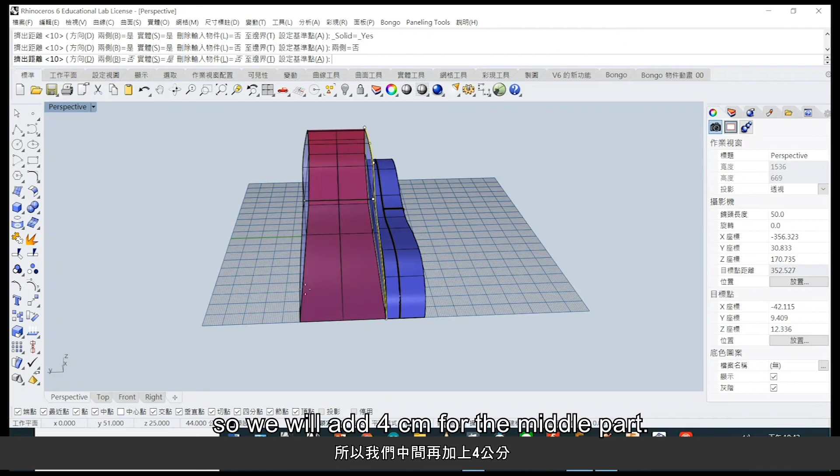Here, we observe the width we need. Previously, we extruded 2 centimeters over here, so we will add 4 centimeters for the middle part. For this last segment, we use the gumball to copy and move it over here to add 2 centimeters more. Therefore, 2 plus 4 plus 2, we have fulfilled the 8 centimeters width requirement for our compressed air racing car.

For these 3 solids we've completed, we'll do a Boolean union. We select the first one, Boolean union, select the first model, the second model, and the third model. After all the models are selected, press enter and it will become a complete model.

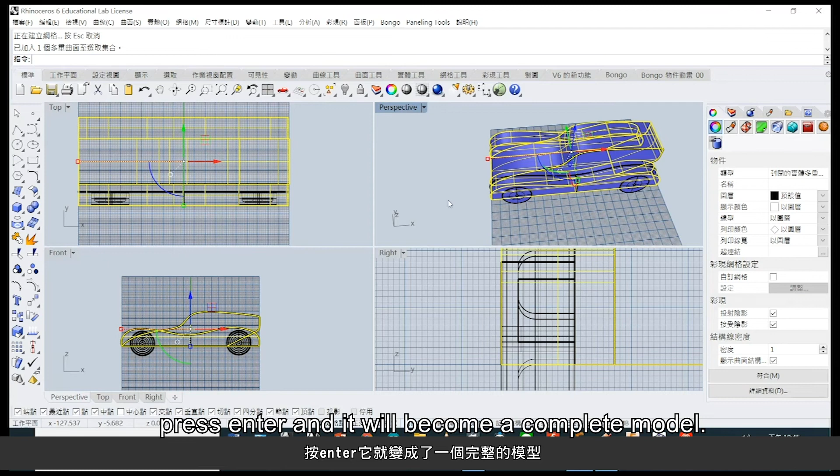Next, we will carve out wheel arches in the car body for our front and rear wheels, so that our wheels can spin within the body, as well as the space where we can place our steel cylinders at the back of the car.

We switch to the front view panel and maximize it, and use the cylinder command with respect to the center of the wheel. We enable grid snap and center point, approach it, and draw a cylinder slightly larger than our tire. We check the top view, wanting to cut out 4 millimeters more than the width of the tire.

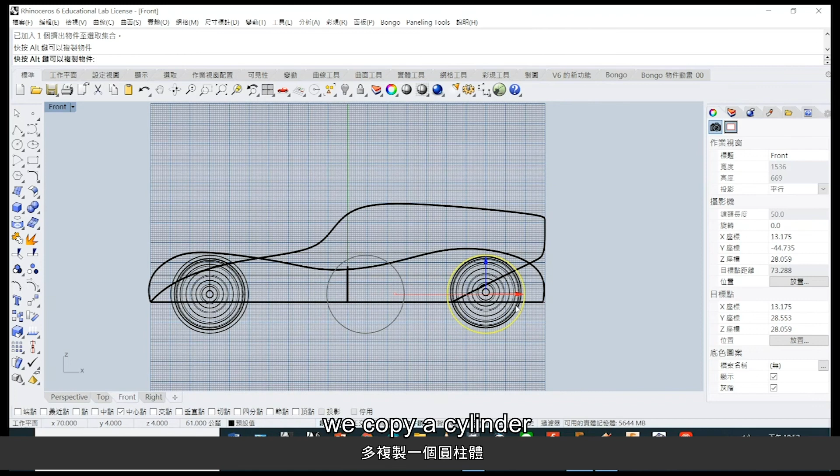This is the cylinder we want to use to create the wheel arch for the front wheel using Boolean difference. The same goes for the rear wheel. We use the gumball to copy and move this cylinder to the rear wheel, then copy another cylinder to the center of the rear wheel.

Let's switch to the top view. These are the 2 cylinders that will be used to make the wheel arches of the left side. We use the mirror command, found inside the Modify tool with an icon that looks like a saw, so the right side has the same cylinders. Based on the center of our model, we make an axis of symmetry. By pressing and holding Shift, it can align to the horizontal direction, so the right side of the car also has the same cylinders.

We will use Boolean difference to subtract the space we need for our tires. First we select the tires and click the light bulb to hide them, then have a look from the bottom.

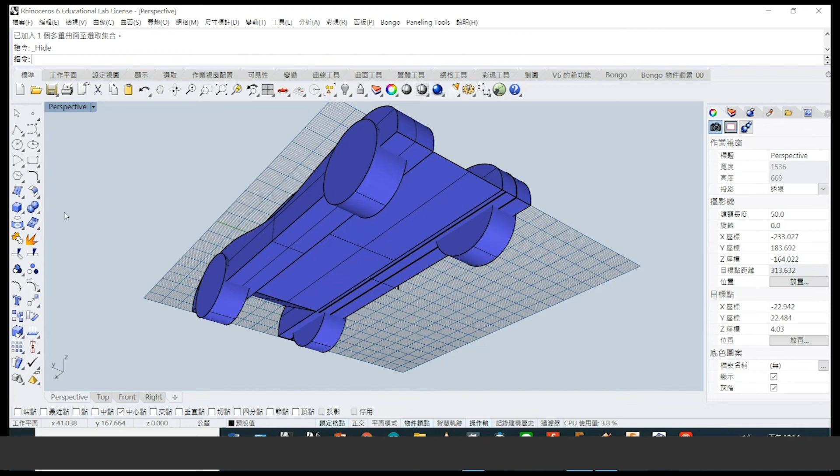For Boolean difference, we select the second icon and select the car body first, which is the multi-surface we want to keep. Press enter, then select these 4 cylinders to carve out the wheel arches we need.

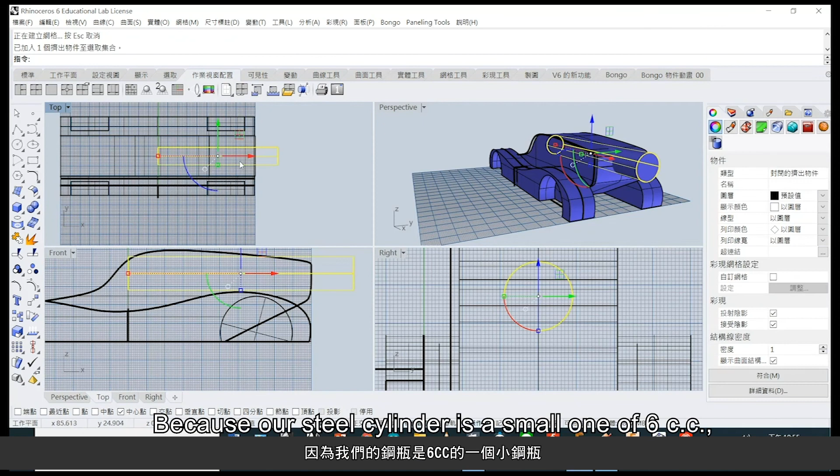Next is the space at the back of the car, where we will place the steel cylinder. We open the right view panel and draw a cylinder at the position we need, with a diameter of 18 millimeters, so at the command bar we input 18 as the diameter of the steel cylinder. Because our steel cylinder is a small one of 6 cc, we move it to a depth of 5 centimeters from the end of the car, then stop.

Here we will adjust it to the height we need, at 4 centimeters. Then we do a Boolean difference again: select Boolean difference, first select our car body, press enter, then select this cylinder. We have completed the space needed for placing our steel cylinder.

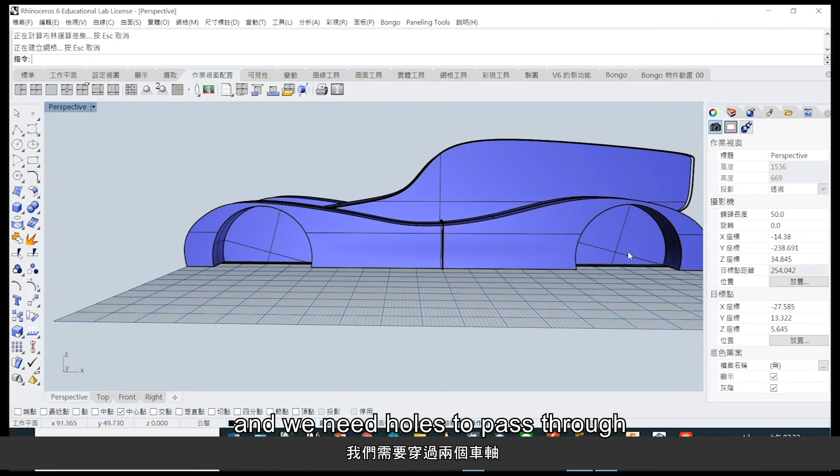Finally, to match our chassis design, our tires are pierced through from left to right, and we need holes to pass through the axles. So we repeat the Boolean difference to carve out the axles. We draw two cylinders in the front view panel, based on the center of our wheels, with a diameter of 1 centimeter and a length that can pierce through the whole body, then move it to where it pierces through the left and right side.

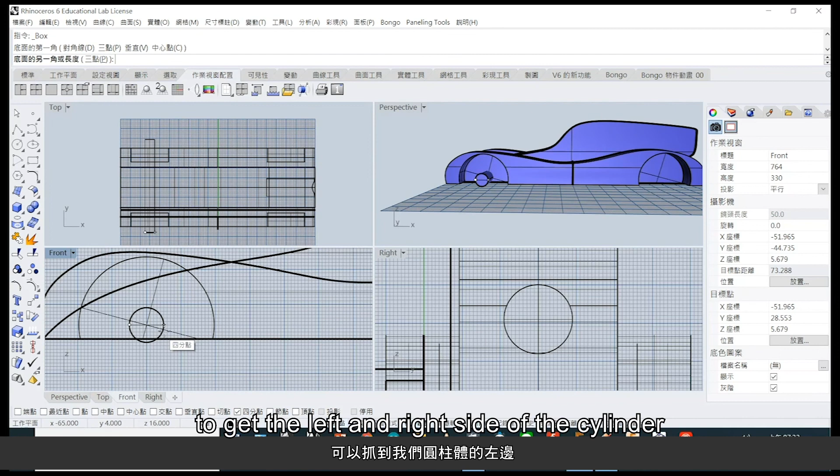We'll also draw a rectangle, using quadrant mode to get the left and right side of the cylinder as well as the very back end. You can see the combined shape of the cylinder and rectangle. We use Boolean union to merge them, then copy this same model to the position of the rear axle.

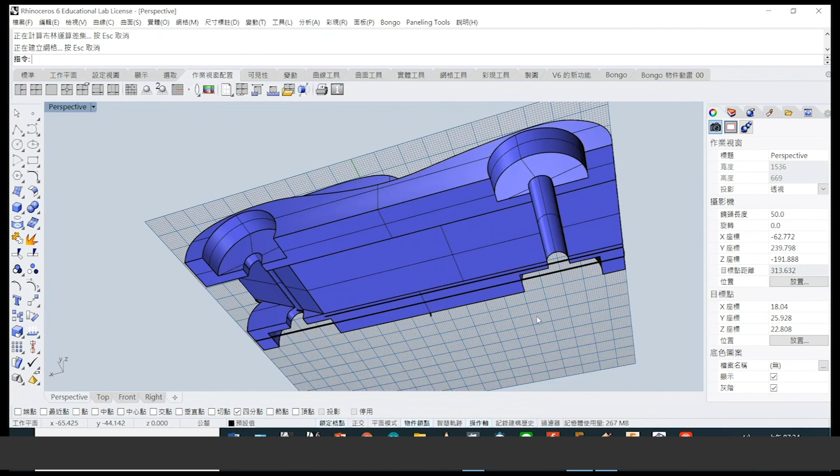Let's go back to the perspective view. Finally, we need to use these two solids to make a design for the axles to pass through our car body. We use Boolean difference: first select our car body, press enter, then select these two solids and press enter. And here we have completed the appearance of our compressed air racing car.

Let me turn the model around for the students to see. We put the tires back, right-clicking the light bulb to display them, and do the same with these tires, then mirror them to the other side of the car.

The mirror command is inside here. Along the central axis of the car, we mirror them to the right side of the car, then remove these lines. And here we have completed the design of a compressed air racing car.

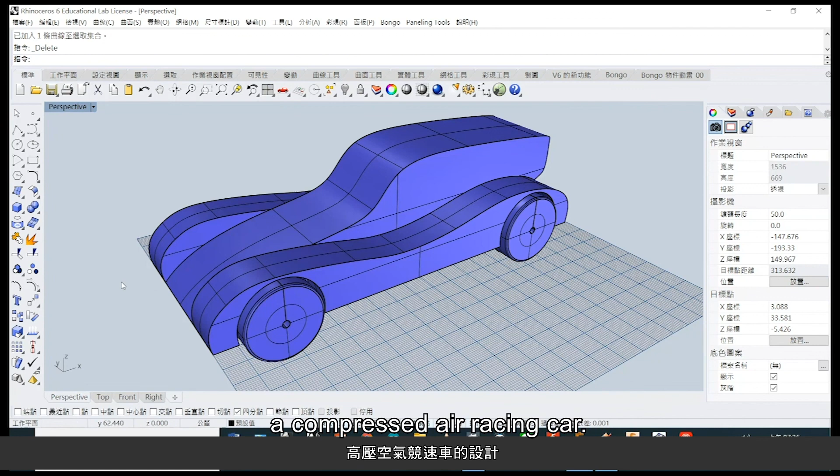We can choose the display mode to a rendered display to see the appearance of our entire model, or the ghosted display to see if the spatial structure design inside our model is reasonable or not. And we have completed Rhino's basic command learning and the basic modeling design of a compressed air racing car.